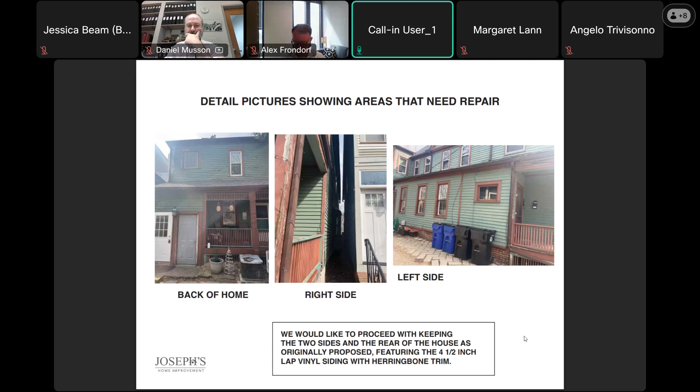We want to omit the complete front of the porch until Mr. Wintering decides what he's going to do with the front porch. He doesn't know - it's got to be maybe rebuilt later down the road, but we want to keep everything the same that we did, with the corners to be the alternate color as the trim, and the house to be the seagrass color. It's from top peak.

He would like to do it shake on the front of the house, which is the same color as the house, and the trim - they'll still do it. It's got a lot of different variations as far as the breaks in it, so my guys definitely can do it the same exact way as the house. They have a break that can make the different bends in it.

And then the trim around the window would be the same, but he wanted to do that in the shake of the same color. If he can't, they said they wanted it to just be the siding. We thought maybe just the siding, and they said maybe an alternate color. We really didn't want to do that, but if that's the case, we would.

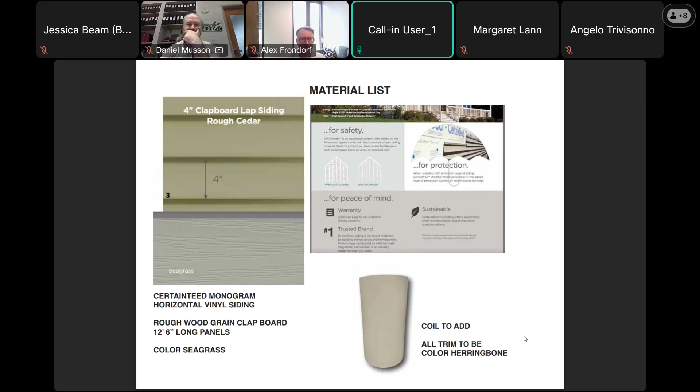But we did drive around after leaving the home when we went to meet Mr. Musson out there, and we thought that if he had to do the scallop, we would add the scallop instead of the shake. But we did order shake to begin with because that's what we thought we were going to be able to do. But if we had to do the scallop, he would just do the scallop.

And then on the second part underneath that is another part of the house, above the roof where the porch is, and that has the two windows. We would like to still case out those two windows with the trim, and if that had to be a different color, we would do that a different color. But we're just open to suggestions.

All right, does that conclude your presentation? Pardon me? Does it conclude our presentation? Oh, I think this is Tom, the homeowner. I just want to jump in and add...

I'm excited to talk to you all and get your perspectives on this. As someone who is a lifelong Clevelander, if you didn't read my note last time, I'm really passionate about helping to build up this area. I think this is such a unique street in particular, and the more that I can do to maintain the vision I had in mind, which I think is in keeping with the aesthetics of the street and also with the mission of this board, I'd love to do that.

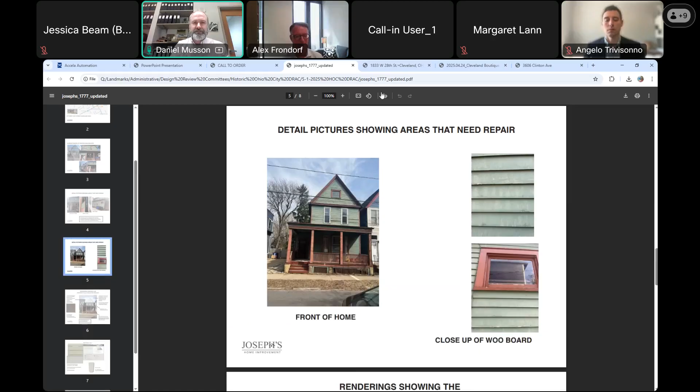Okay, thank you. And I'll be right back. And it looks like our Madam Chairwoman has joined us now. Perfect. Unless she needs a moment to get settled. I didn't see right when you hopped in. No, I saw the last few minutes, but I didn't see most of the conversation of that one. But I am here, I apologize. I had an issue with school that had to be taken care of. Know how that goes, lots of fun.

So we are on our second agenda item, which is case HOC 25-18, 1833 West 28th Street in the Ohio City Historic District. Proposed renovation.

I believe we have, I'm not sure if it's the homeowner, but I think it's the homeowner here with us, Alyssa Melendez, are you on the call? Okay, I've got your presentation up and I can click through it, just let me know when you want me to advance slides. I think this applicant did submit some additional information yesterday afternoon that is not included in this, but I think it's detail that could be provided verbally, with assurances that staff will have all the details in front of them if you guys decide to make a motion to move this forward. So Alyssa, just let me know when you want me to advance slides, please.

Okay, yeah, you can go ahead. So I am the homeowner for 1833 West 28th Street. It is a duplex, kind of on separate floors. The first floor is its own 2-bedroom unit, and the second floor is its own 2-bedroom unit. There is also an unfinished attic attached to the second floor unit, and I am looking to have that finished to add, not a third unit to the house, but additional living space to the second unit. So this will essentially be like a master suite, with a bedroom, bathroom, and a washer dryer area. That's kind of an overview of the project.

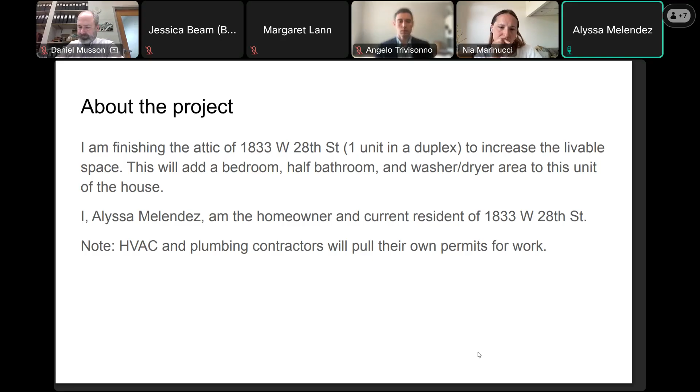You can move forward to see some pictures. This is kind of the location of the house. It's on West 28th, near Dave's, a little bit by Jay and West 28th, on that intersection. This next map shows a higher view of it. It's that blue house with the arrow pointing to it.

So here are some current images of the exterior of the house. You can kind of see the first and second floor units, and it's against an alley. You'll note in the first picture it shows a window going into the third floor. There are currently just 2 windows going into it, that front one, and you can see near the top of this back photo of the house, the back window. So those are the 2 exterior windows for that.

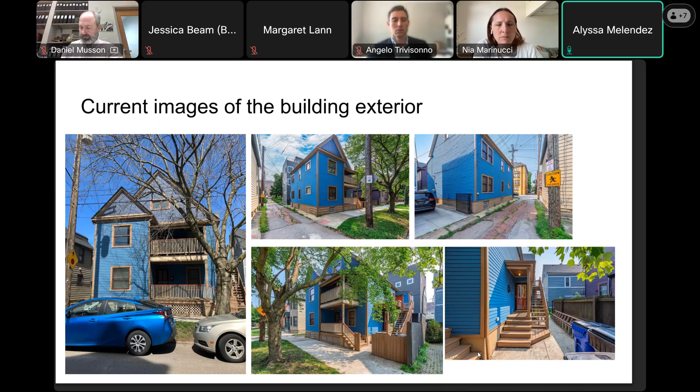We can move forward. This was in the documents I was looking at, to include a street view, so you can see what the street around it looks like. There's this apartment building across the street. Just some history about this house: according to the records, it was built in 1900, and it's been used as a residential home. It's currently a duplex with 2 units, 1831 and 1833 West 28th Street.

The modifications proposed are modifying the upper unit. Next slide. So here's some pictures of the space as it stands right now. I think there were previously the beginnings of building a 2-bedroom space up here, but it's very much not finished. The furnace for the second floor unit is up there, along with all the ductwork for that. And there's some basic lighting and electricity up there already, but no insulation or anything else besides that.

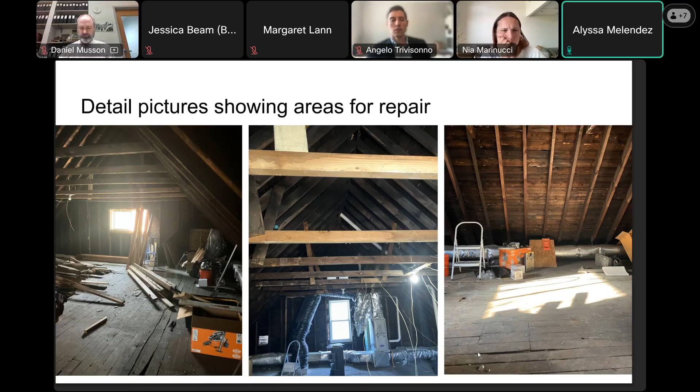You can see in one picture the vent pipe for the plumbing going through there as well. There's currently a gas line up there for the furnace, but there is also no water line up there, so that will need to be added for the bathroom. Next slide. Just more pictures showing different views. Next slide.

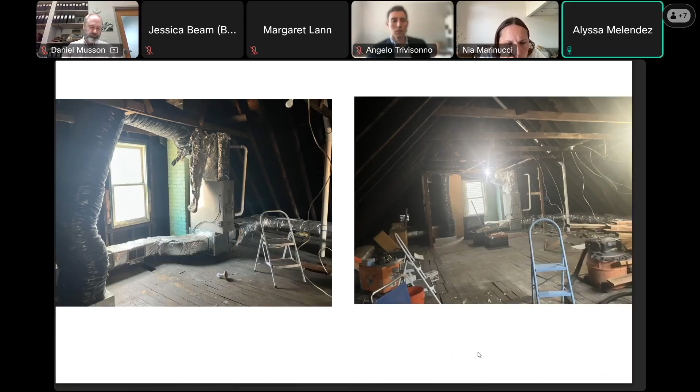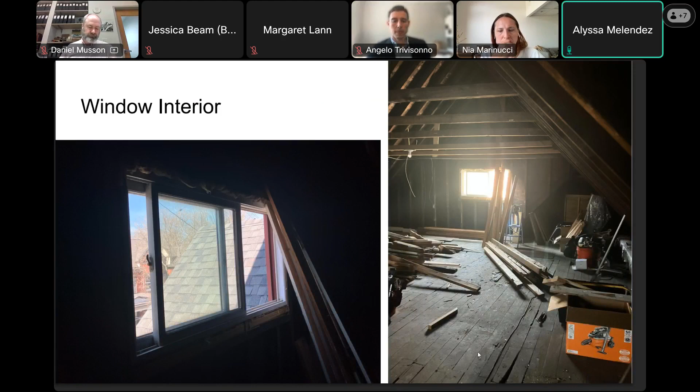So these are more pictures of the window, because there is one exterior change that will happen, and that's to this front-facing window. This is how it currently looks from the inside of the attic. And if you go to the next slide, I believe I had pictures of the exterior of the window.

I worked with an architect to do drawings for the finished attic space, and he proposed that we needed to make this window bigger, partly because of code in terms of floor square footage and natural light square footage. So the proposal is to make it 1.5 feet taller, keeping it the same style window. I added details about the size of the current window: it's about 2 feet 4 inches by 4 feet 8 inches. The new window would be 3 feet 10 inches by 4 feet 8 inches.

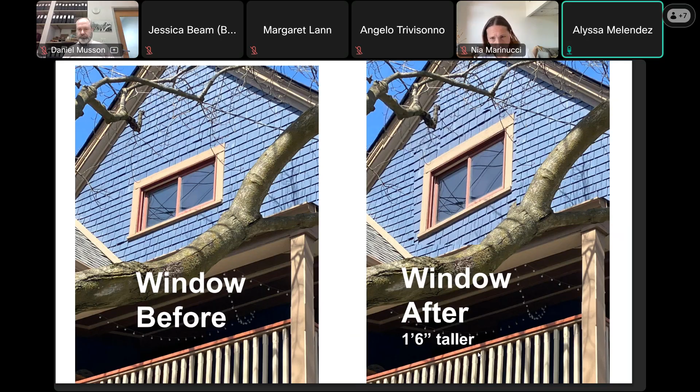I think this was why this project needed to come before the design review committee, more so for this window. Because this is an exterior change, and in terms of the interior details and changes, I have briefly included those in this presentation, but they aren't as much focused on. But we can move on to the next slide.

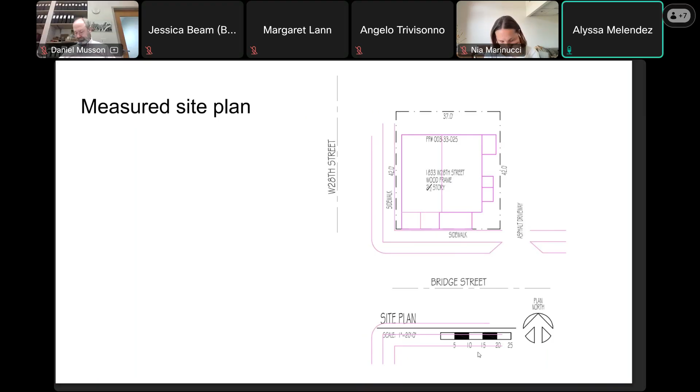So this is kind of the site plan. No changes to the building structure really and how it's laid out, but you can just see a high level view of the site and the sides of the building. We can move to the next slide.

This is the plan for the attic and the architect drawings for that space. You can see it's an open space, kind of a bedroom area. There's a lot more details on this - I included the full drawings at the end of this presentation if we need to look at any of them more in depth. I worked with a licensed contractor who's worked on many homes in the Ohio City and Lakewood area, many older homes, to architect renovations like this. So it's adding the bathroom here, the bedroom.

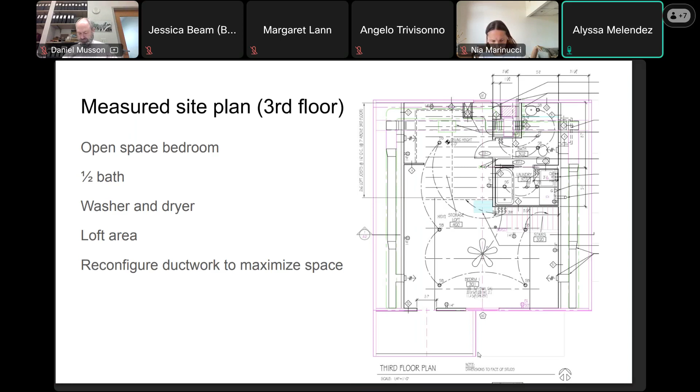There is going to be a loft area too, kind of - you can't really see it on this drawing, but it'll be above the bathroom, that half of the building, of the room. And then there'll be some reconfiguring of the ductwork to maximize the space as well. Next slide.

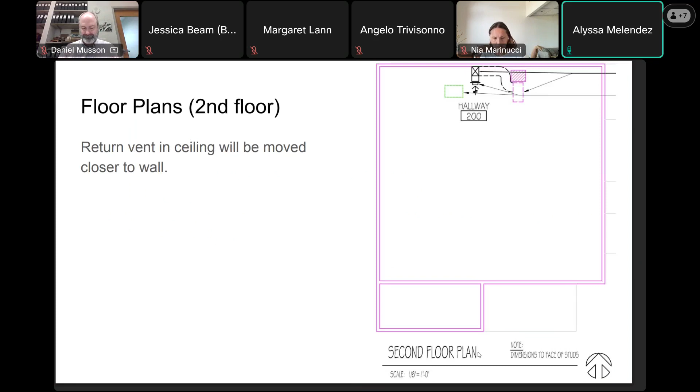This is just a drawing of a change to the second floor, moving the ductwork, moving the return vent in the ceiling closer to the wall, just to maximize space efficiency. That's the only change there on the second floor. You can see green where it currently is, and that black area is where it's going to be moved. Next slide.

Next slide. And I will say, with the window too, and the additional information I sent yesterday, I looked into the JELD-WEN windows and found a potential one that would match the new sizing requirements and also match the current window in terms of colors. So I included the model number and information about that specific window, but otherwise that's all I had. There are more slides on here about the drawings.

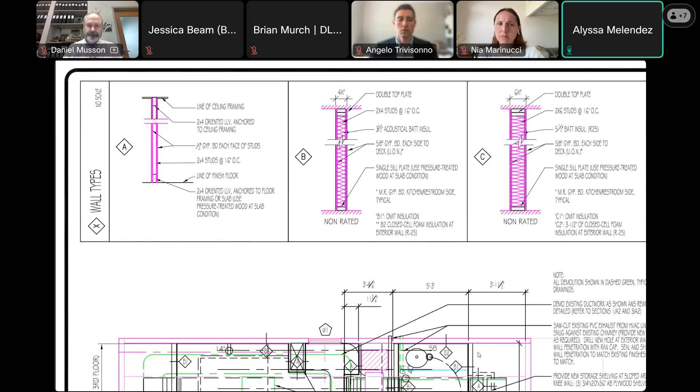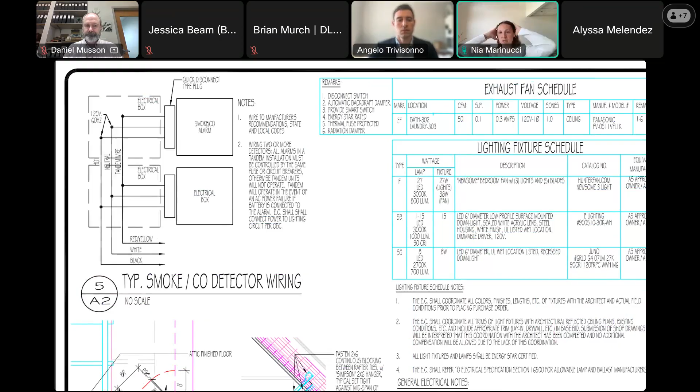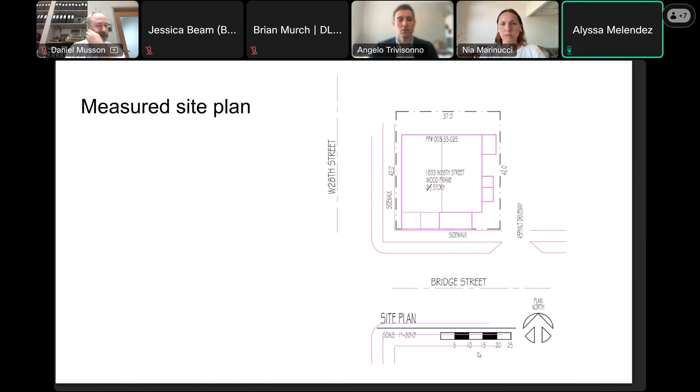Thank you for your presentation. I have a clarification question. In the documents, it was labeled as a double hung window installed sideways. Is that the intention of the application? I think the intention when I found the specific model was actually doing a slider window from JELD-WEN. I think that makes more sense because we're going to keep it sliding like that. The specific model was the JELD-WEN W5500 2-panel clad wood horizontal slider window.

Okay, thanks, I was concerned. I would, as an architect, not recommend installing a double hung window sideways, but a slider application is obviously designed to be in that orientation, so that makes more sense. I'm not sure that I have any issue with the window growing in size to meet egress code. I think that makes sense. I think it would look more appropriate probably as a single double hung window, just modifying the opening to match that, but I'm not sure if there's a physical constraint or a material constraint. Not wanting to disrupt so much of the existing material could be the consideration there, but I don't have opposition to this, effectively the same window growing in size.

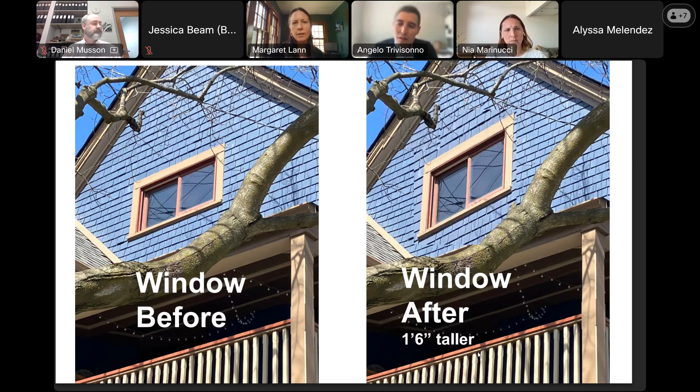I wondered, is it possible to consider a casement? I don't have opposition to the window opening being bigger. I just know that sliders can have a lot more problems because debris, dirt, and ice have more opportunity to build up in there. I also think a casement would be more historically appropriate, but does that meet code requirements? I'm not an architect, so I'm not sure.

To answer your question, most casements, well, it depends on the overall dimension, but typically casements are a good alternative to a slider or a double hung because you can achieve the required opening with one panel of the window versus half the panel of the window, if that makes sense. They are more expensive than a double hung typically, but I don't know how that equates to a slider from a cost standpoint.

Yeah, I'd be open to considering a different window type. The casement would be the same size, it just opens differently rather than as a slider. It opens out, right? It could open out or in, depending on. And I wouldn't change my vote, or withhold approval, based on that. I just wonder if it could be a consideration. Yeah, I can look into it and see, Mark.

Are you talking about one large casement window or a pair of casements? A pair, two pairs. Okay, a pair of casements, got it. Dan, is it possible, it sounds like maybe the property owner sent you a model number for the window. Is it possible to Google that and share it on the screen? Not from where I've got, kind of limited tech today. No problem. If she could share that model number again, maybe people could look it up on their own and Google it themselves.

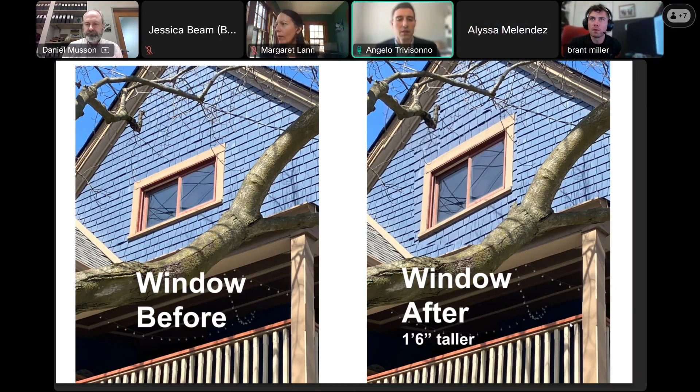But same, what window was that the property owner's thinking about now? Oh sorry, the one in the architect drawing is not the same one. Okay.

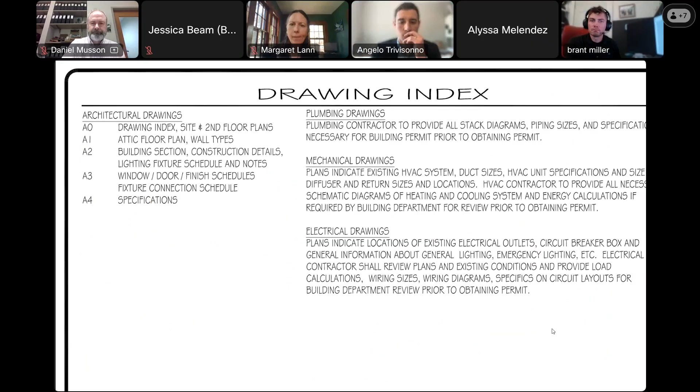I sent the name of the one I was looking at in the chat.

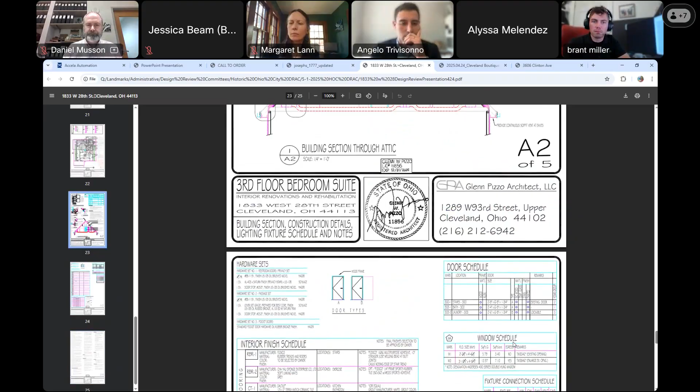I guess my only comments are I would support as presented. I have no objections.

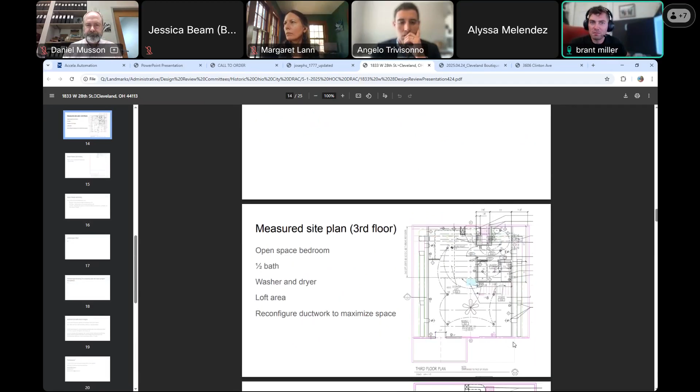Melissa, I apologize if you said this, is it going to be the same color on the exterior? Yeah, yeah, the red color on the window, okay, and then the trim as well.

And I will just say too, the model that I found, it doesn't exactly match the size. It is slightly larger, unless I did a custom order of a window, right? They don't sell the exact dimensions. But it's as close as I could get to what's needed.

Are you talking like within an inch or two, or how close? Just curious.

Yeah, so the proposal was, let me just do the math. It was 3 feet 10 inches, so that's 46 about by 48 plus 8, 56. And the model I found is 47 by 59.

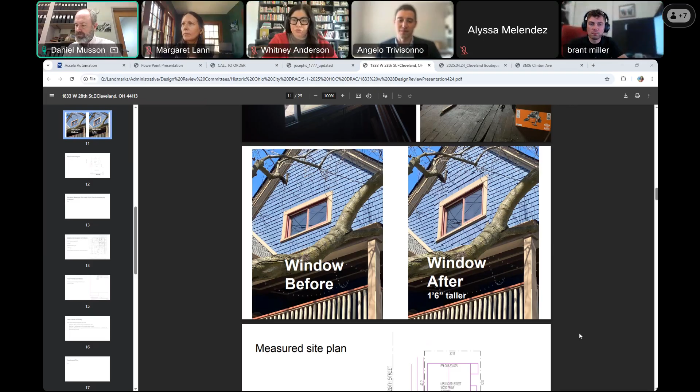All right, unless there's any other discussion. Ms. Anderson, yes. Ms. Lann, yes. Mr. Miller, yes. Mr. Trivisonno, yes. And Ms. Marinucci, yes. All right, Madam Chair, the motion passes unanimously.

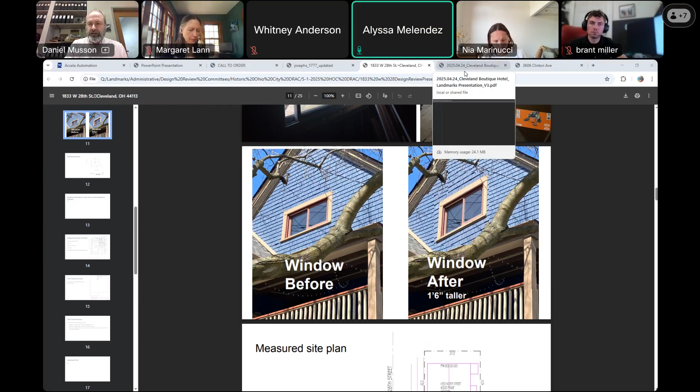All right, next up we have a schematic review. So we won't be taking a motion on this, but this is HOC 24-35, 1950 West 26th Street in the Market Square Historic District. It was previously reviewed schematically December 5th, 2024, new construction of a boutique hotel. And I believe we have Amy Haney and Dan Whalen here.

So Amy, just let me know when you want me to advance through the slides please. Yep, I'm going to hand it off to Dan. Sorry Brant, I cut you off. Sorry, I'm going to hand it off to Dan, and then our project designer Brian Murch is actually on today, so he's going to do the presenting with Dan this time.

Dan, and Brant, you're approving, right? I'm recusing myself, I have to also recuse Dan. And I don't know, is this schematic? Yeah, it is schematic, yes. So there's no motion taken, but okay, great, so we will be recused. I think I also have to recuse for the same reason.

Yep, and this is just a procedural question, I'm sorry before we start. When this comes up for a final review to us, does this committee at full attendance, do we have quorum, assuming kind of the same members? Yeah, if you have quorum at the beginning of the meeting, that's considered quorum for the entire meeting, so even though 4 of the 9 members will need to recuse themselves, hopefully enough people will show up to that final meeting that it's not like a 2-0 vote.

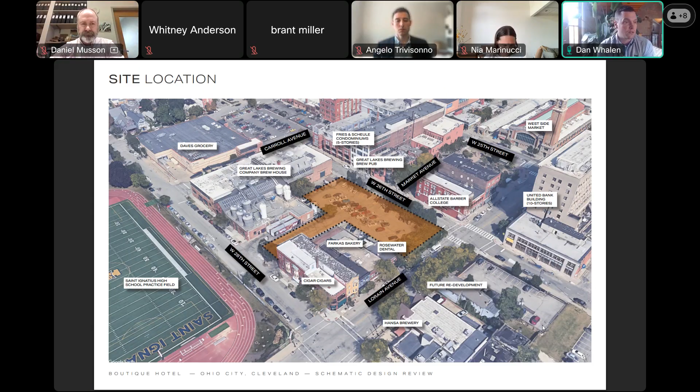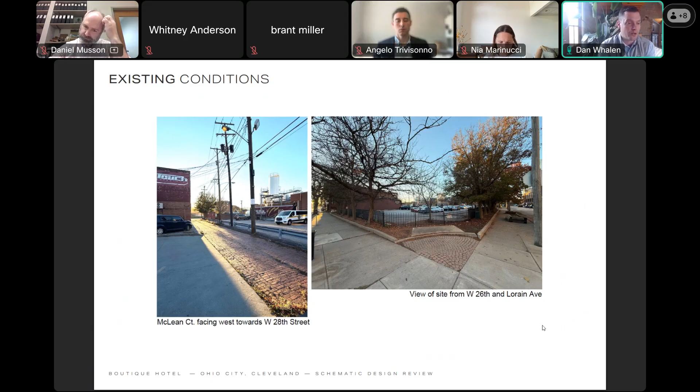So we can go to the next page, and we'll zip through these. These existing conditions are the same as last time. Lots of electrical poles, lots of overhead wires, pretty tattered and beaten concrete, and that McLean Court brick road off the rear.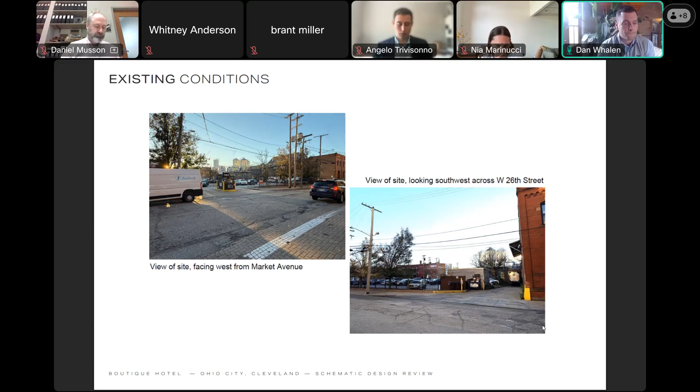So next slide. These are kind of technical and hard to read in this situation, so for the civil drawings we'll flip through and I'll gloss over, because it's much easier to read in our landscape and hardscape diagrams.

So this just shows the area we're going to be improving and demoing - that little guardhouse or toll booth you saw, along with some of these trash enclosures and a lot of the utilities around the site. Most specifically, we'll be burying and removing all the power lines on the Lorain and West 26th frontages. We'll show that in some of the renderings and views.

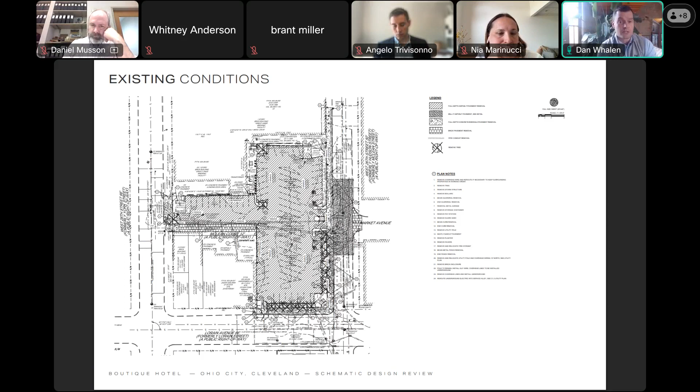But mostly it focuses on, especially since we have the luxury of 3-sided access to 28th Street as well, the ability to shove all of the service uses and utilities to the rear of the building, outside of the public realm, and really maximize our impact on the pedestrian frontage and the areas where most people are - especially that view down Market Avenue, which is now a pedestrian street at all times.

So let's sweep through these next couple pages. You can see the site plan here. We're thinking about pavings being a little more elevated than just typical concrete, so we're working with city departments on what's allowed in the right of way, and we'll push on that where they'd want typical concrete - we're going to push for more pavers and landscaped areas.

And you can see here off to the left that all the truck access, loading, trash, and those sorts of things will happen directly through that appendage that goes out to 28th Street, adjacent to Great Lakes' larger truck dock.

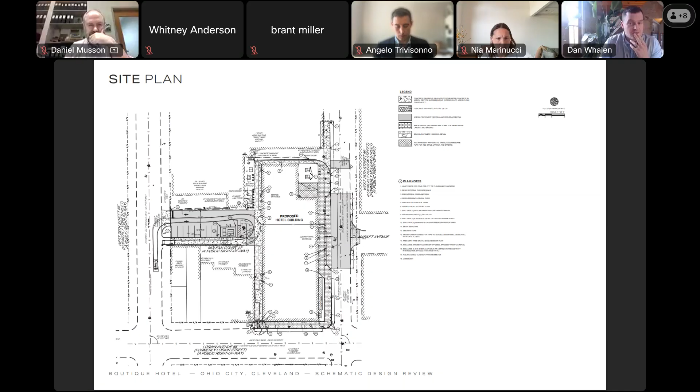You can keep going. Sorry, next page. Nothing's moving. Okay, keep going. I'll let you know when. Is it frozen or is it advancing? It's going, seems pretty slow, but now we're on the program page. So is that where you want to stop? Yeah, for now.

So I'll pass the baton to Brian, the lead design architect and principal at DLR Group, who is our project architect. But at a high level, the gross square footage - we've got a restaurant on level 1, a rooftop bar that we're proposing. You can see the key count and some of the miscellaneous odds and ends, as well as our on-site parking.

I'll quickly talk about parking. Previously we had a full level of parking at about 42 spaces net. The cost to build that relative to the space count was exorbitantly expensive. You'll also recall it made the plinth of the building, the lower two floors, disproportionate to what was happening above, and there were a lot of questions about how we might screen that. So we've taken a progressive approach to eliminate it entirely. We'll have some space behind the building in that drive lane I was walking you through, and we're working on other arrangements for valet parking and overnight spaces with adjacent property owners. We're having good conversations and feel good about it.

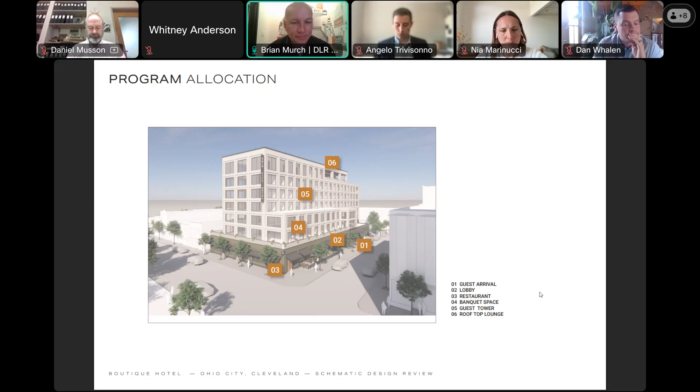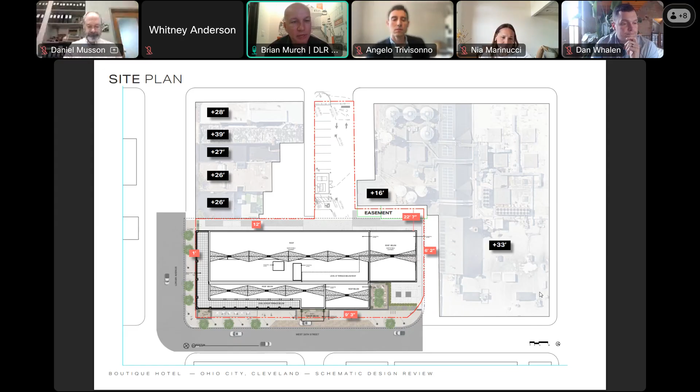So a zoomed out version of our site. The red dimensions allude back to the setbacks we have around the building. More importantly, the one that's 12 feet on the back along Lorain gives us a little leeway - as we looked at foundations for the building and those existing buildings, giving ourselves some tolerance when we start construction. So it provides access back to our kitchen that lines the restaurant along Lorain, and also gives us an access point for egress in and out of the building. So it did a couple things for us.

The next slide shows a zoomed in, enlarged version of that ground floor. The point to make here is that front arrival - we've got Market Avenue and how it terminates at the hotel, building up that architectural terminus at the end of the street as our front door as we invite guests in. Dan mentioned the enhanced paving we're planning along our sidewalks, creating a welcome mat out in front of the hotel entrance.

So you could see that darker brown material highlighting not only the car arrival or guest arrival, but also the entrance in and out of the hotel. On the corner of Lorain, you can see another version of that, with our restaurant independently branded as its own venue within the hotel, having its separate entrance on that corner.

I'll chime in quickly on the sidewalks and our approach to landscaping and hardscaping. Especially as you walk around 26th Street, there are a lot of pinch points where patios, fences, or trees make it difficult to walk in both directions because there's only 3 or 4 feet clear. There's a lot of bricks popping out of the sidewalk and a lot of broken concrete.

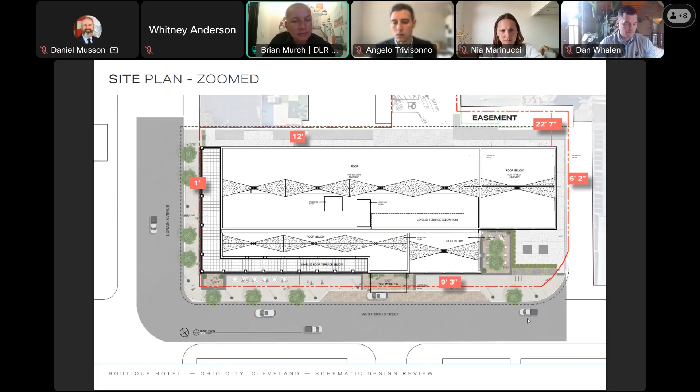Great points. The next slide covers a little bit of that hardscape in a more 2-dimensional drawing. The next slide shows off some of the intent with the landscaping. The next slide details - you could probably skip that. And the very next slide gives you an idea of some of the accessories for the site.

We're looking at the paving patterns with those pavers, trying to create some borders, specifically at the front door, where we can enhance things and create a little hierarchy as people move through the site. We're also bringing a residential character to the building, softening it up with the landscaping, having pots and planters that are movable so we can rearrange them at different times of the year and highlight some of those areas in and around the building.

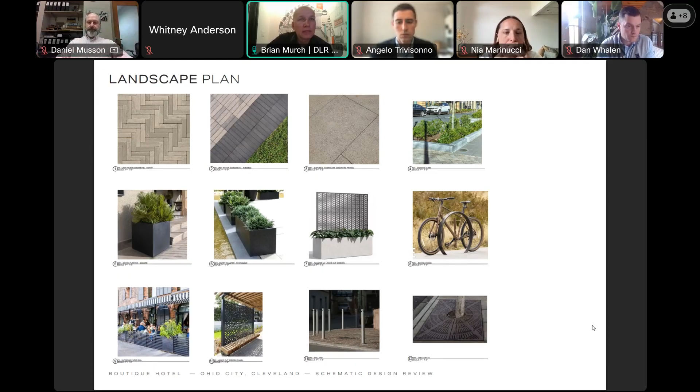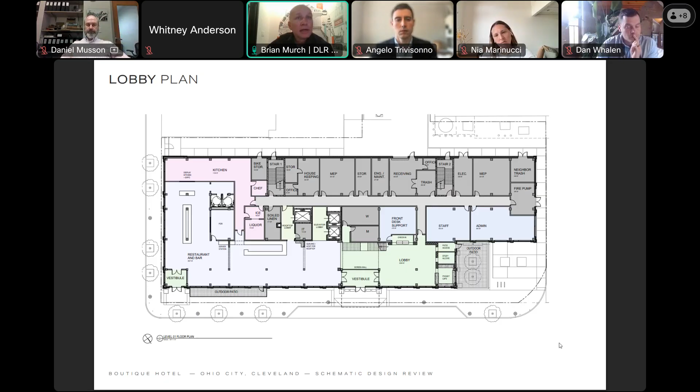The next slide takes us up a floor. We talked about that 4,500 square foot ballroom space or event space at this level. Right now we have a big two-story volume, and you'll see it in some of the 3D representations where we have a stair that connects up to that pre-function, that lighter yellow color, and then that takes you into a ballroom, all wrapped by that outdoor terrace - being able to look out over the street front and give people the opportunity to step outside.

Opposite the ballroom space is guest rooms, as you can imagine. So this would be our amenity floor. We do have a fitness center, and then thinking about the kings and queen rooms as they line that hallway that makes its way from left to right.

The next slide shows the floor directly above, and as you can imagine, that ballroom level wants to have a little more volume to it. So we can't really fill in guest rooms on those two pieces, but they do make their way down the hallway - I think that's the next slide.

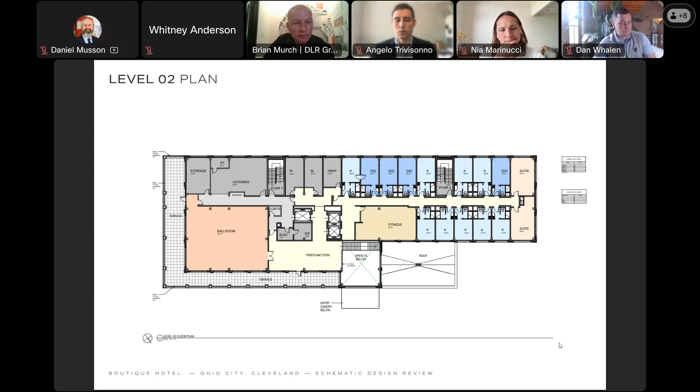Might be some lag there. Hasn't clicked over yet. Yeah. There it is. You could jump to the next one. Yeah.

So typical guest room floor plate, double loaded corridor, kings and queens. You can see how we're enhancing the corners of the building with those larger guest rooms. We've labeled them suites, just thinking about - you've got extra windows, a little bit bigger guest room. So enhancing those corners and what we can do just to wrap the architecture and have some fun.

The next slide takes us to, I believe, the very top floor of guest rooms. Maybe one more. So here we have a couple of those corner suites combined to create our presidential units. You can see in scale, it just grows proportionately. We've also amenitized it with its own little outdoor patio.

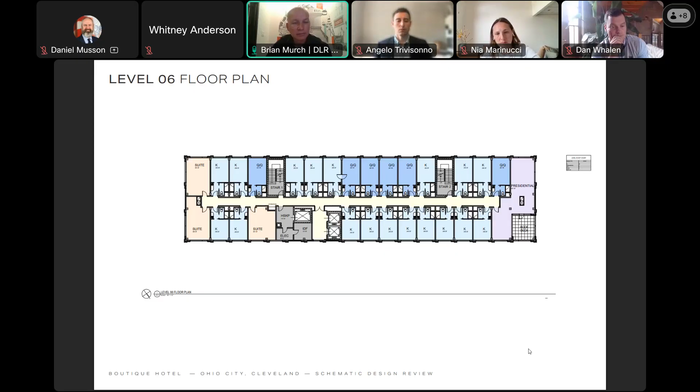And then the last floor plan, the very next slide, shows our rooftop. In this case, the lighter purple color represents not only our rooftop lounge, but also a premium venue on the top floor that is a cocktail room. So we've got an opportunity to host separate parties or do different functions so they can work simultaneously. I think with the rest of this, it's providing food service for this level, some restrooms, and then storage and mechanical at the rooftop.

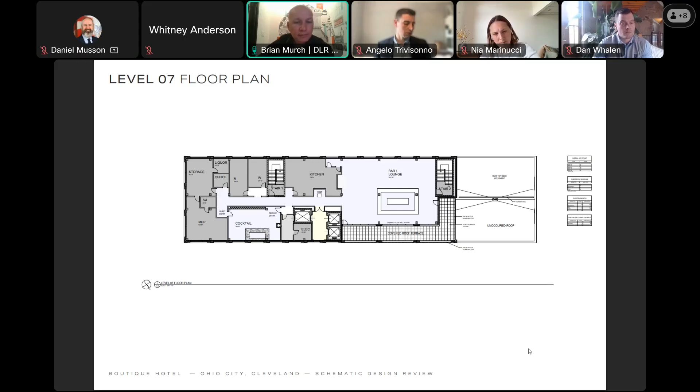The next slide starts to pick up on some of that inspiration. Dan, I'll let you kind of touch on some of this to start us.

Sure. Looking back at what we had before, maybe we were lukewarm on it, not just this board, but even internally. And I think what we've gotten back to is wanting to do something that is contemporary in nature and is its own thing, but fits within the context of the historic district and really takes some notions of each and combines them together. So what you'll see is my challenge to the architecture team was, how do we create something that's got a lot of really nice streamlined gridded rigidity to the bulk of the building, but then allows us to do some really fun stuff at the base, specifically with materiality, while not completely making it out of left field and for no reason.

And so we took nods from a lot of the stuff you see on screen and also just other districts that are maybe different in scale, but similar in terms of what they represent, like the Meatpacking District in New York and West Loop of Chicago, where these are districts that are anchored either previously or still by a famous large-scale public market that have new and old mixed together. And you're seeing some of the most intriguing, exciting architecture in my view in the United States in some of these areas. So it was kind of taking some of that, putting our own twist on it.

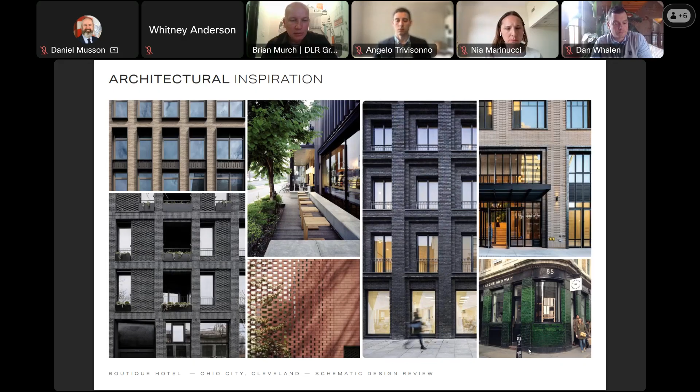The next slide is that shot down Market Ave. That front door I mentioned earlier, it's like our big marquee moment. We wanted to enhance the district, everything it represents, and then how do we extend Market to our hotel and invite people in? So the hierarchy being this box, this brick box that presents itself forward. I talked about that volumetric space, so it links itself back up to the ballroom above and the pre-function, but also this glowing beacon at the end of the street that really draws people in.

You can see the materiality starting to take place. Like Dan said, that bold green brick is kind of an emerald color that gives it a little bit of a riff off of the landscaping and stuff as it highlights those entrances and softens it up. But at the same time, it really creates a contrast from the base or the podium to the tower just beyond.

Just some additional commentary on the material selection we're leaning towards, really about warm materials. So it maybe reads a little bit white in terms of the upper brick, but I think it's going to be more of just a slightly off-white, more ivory, slightly beige tint. There's some projection and depth to how we're insetting certain areas with windows, and even coursing around those windows.

The green, I think, just adds warmth, and it'll probably end up being somewhere deeper than emerald, but maybe not quite a dark hunter green. You could probably tie that to Forest City and some of the Cleveland history in that regard, but more than anything it just feels anchored. It feels warm in an area that, because you're in a city, tends to lean towards heavy concrete and not a ton of green space on these commercial corridors. So I think it feels good in that context.

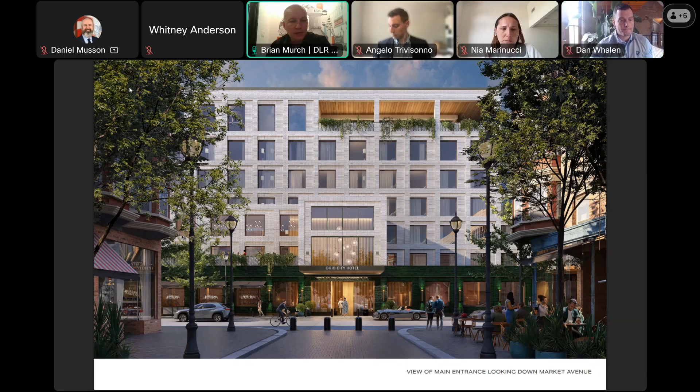So the next slide takes us right up to the front door, just thinking about that guest arrival moment where we set the tone for the interiors of the hotel. Again, the warmth of materials, just thinking about how we use wood in the canopy on the front door, making it less commercialized and a little more having its own personality. We've investigated a lot into the branding of the hotel and the statement we're going to make both on the interior and exterior, so we're excited about all that.

You can see some of those design threads weaving their way into the architecture. I think the other point Dan made earlier was just the breadth of that sidewalk. You see how the street trees and lampposts really offer a lot of accessibility in and around the site, the cafe seating just outside the restaurant and the bar just beyond, closer to Lorain. So again, making it very interactive with how the inside of the hotel conveys itself to the outside, helping activate that street.

Anything else on this one, Dan? Do you want to jump to the last one? No, we can go to the last one.

And while we're doing that, I'll just chime in with, we're using probably more of a darkened bronze as the mullion color and some of the miscellaneous metals and detailing on this building, as opposed to a harsh pure black or anything like that. So it's rendered out right now somewhere in between a more brassy color and a dark bronze, and we'll investigate that as we go and bring those final materials once they're selected in the next stage.

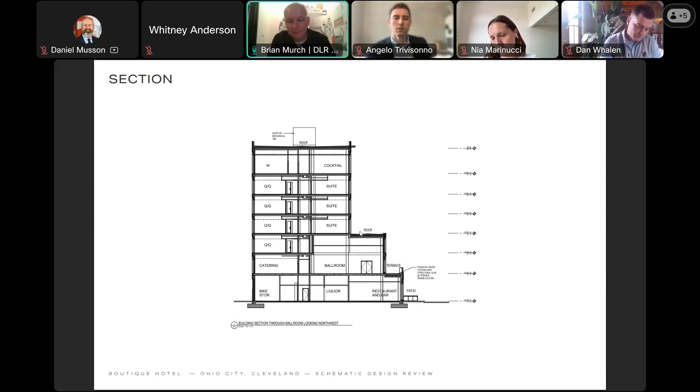All right, since our chair had recused herself, looks like Angelo, it is you and Margaret—did Margaret have to step off? Yeah, she put in the chat that she had to leave. Okay, yeah sorry. They said... I know it's a lot to put on you, Angelo, but you're the only committee member who's here and hasn't recused. I'm happy to chime into the conversation if you want, if that's helpful at all. But yeah, I'll let you go ahead with your thoughts.

I'll say that I think this new conceptual plan is really excellent. I think the renderings are really helpful to understand the massing, especially, and even the materials. I think the pedestrian experience, that building wall, that zone right there, it's a full correction. I think the last plan that had it set back with large columns was the opposite of this, and this is very good. I like the viewpoint looking west along Market Avenue.

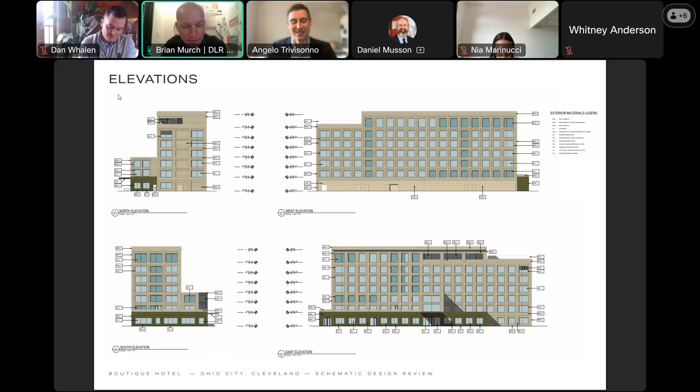I think as you turn the corner, you always kind of bump into these situations where the rules start to get broken, but how do you maintain that same aesthetic? Going back to being an architect and understanding that, like Dan mentioned, it's just something that's in development.

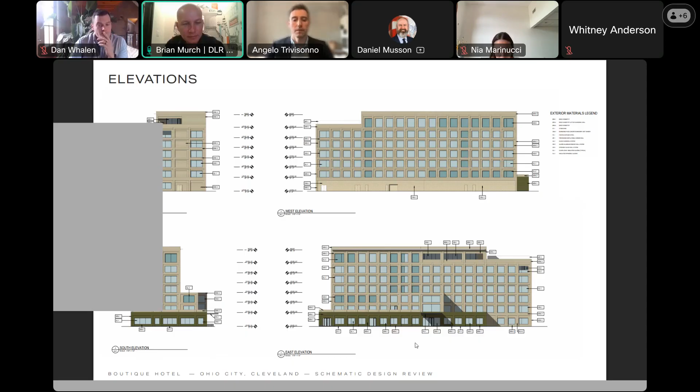I was just finishing by saying it looks great. If this were for a vote, I would vote yes. So good luck with your future progress on this.

Thanks for your feedback, appreciate it. Thanks for not recusing yourself, so we have feedback.

Since everyone else has recused themselves unless Angelo has additional comments, I guess just from a staff perspective I would echo a lot of what Angelo said. We haven't really discussed this as staff much, but my reaction to it is much more favorable than that first round.

I thought there was a lot of interesting and fun things going on in that first proposal, but as far as fitting into the neighborhood, this is much more contextual. It fits into the district both in scale and materiality. I think Amy and Brian have both done a great job under your direction, Dan.

I think even the texture and colors of the masonry - having that first floor offset as a different color - I think that green could be really stunning. With the upper floors, I think, like you said, we want to avoid a pure white.

But looking around, there are some terracotta buildings. You've got Fries and Schuele right across the way. I don't even know who's in that building right now, but the one right across the street used to be the #1 Cup building, right across from Fries and Schuele on 25th. So there are examples of that kind of feel.

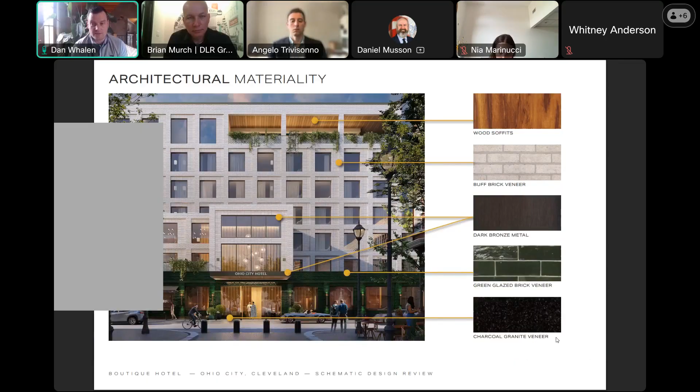Yeah, no, I feel good. I feel also just great about what we're presenting, and I think that goes a long way as well. When we go next week to the commission, we'll have, I'm sure, tons of feedback of all types.

But no, I honestly wish that more people were able to opine and give their feedback. But hey, sometimes it just comes with the nature of the business, so I understand. A lot of partners, a lot of people, I think, want to see this one happen.

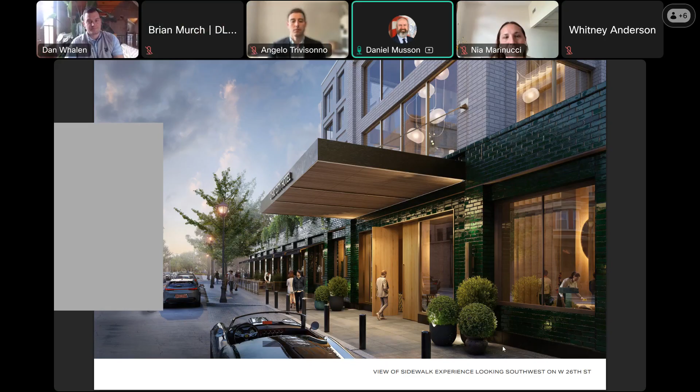All right, last but not least, we have case HOC 25-19, 3606 Clinton Avenue, the Ohio City Historic District.

I believe we have Patrick here, who is the homeowner, and he wants to do some renovations to his home. From a staff level, this is one we could have handled administratively because it seems like the work is generally appropriate. There might have been a little back and forth clarifying details, but Patrick, I think it's one you guys should see, just to highlight what a good project looks like, and as a reminder of some of the stuff that goes on that you don't always get to see in our every meeting. Patrick put together a very nice presentation, so I'll hand it over to Patrick.

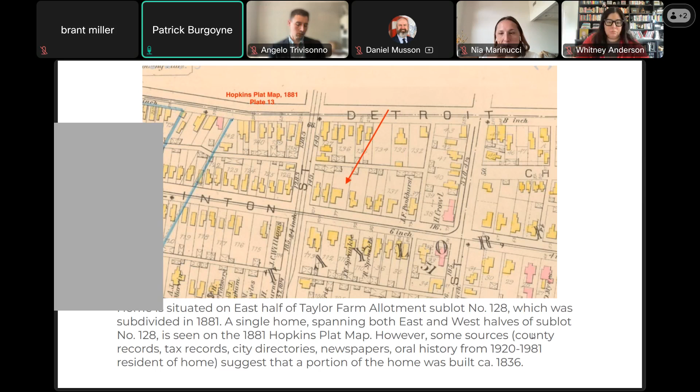So this map is showing the house that existed across both east and west halves of sublot number 128 prior to being subdivided. My house now sits on only the east side of 128, and there's a separate home, my neighbor's home, on the west side. Next slide, please.

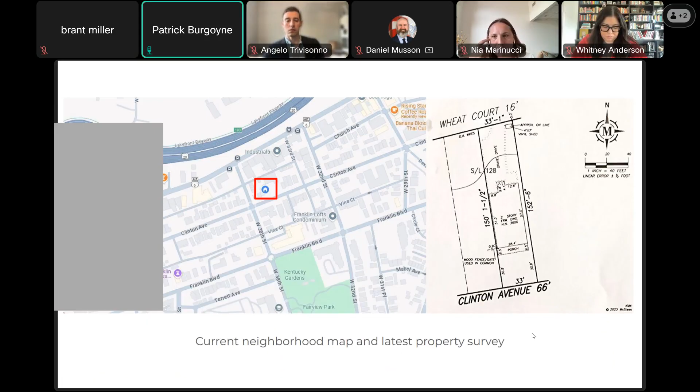I don't know if I'm the only one seeing this, but there's like a gray box covering part of the slides. Do other people see that? Which part of the slides? It's like a portrait-oriented gray rectangle on the left-hand side. Oh, there it is. Was that on all the slides? It was, but it wasn't blocking any important info yet, just covering the west facade of the house. It wasn't on the slides of previous presenters. Only weird, sorry. No, you're fine.

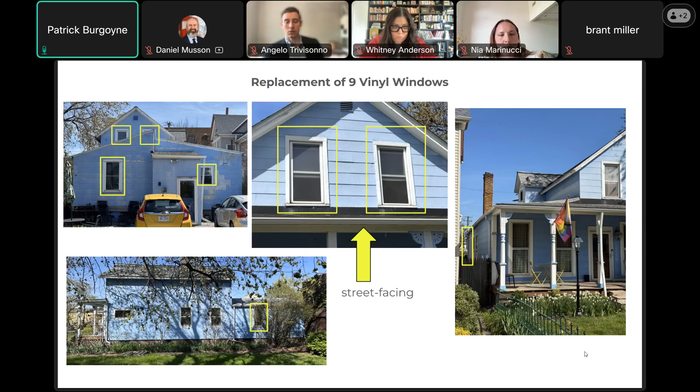After doing some research and talking with some neighbors, what I'm proposing for the replacement windows are the Marvin Ultimate Double Hung G2 windows, which have an aluminum exterior, which I'm proposing in the evergreen finish, and a wood interior. I would also be looking at replacements that don't have any divided lights, to match the existing original wood windows on my home.

The next category of renovation is restoring the front facade. My entire house is covered in composite siding, and dealing with all of that isn't feasible for me to accomplish anytime in the near future, but I think there would be a big visual impact to addressing it just on the front facade.

I plan on painting the rest of the house's composite siding as is. But on the front facade, there's some damage around one of the windows on the 1st floor that exposes 5 1/4 inch drop siding, which I have no reason to believe is anything other than the original wood siding of the house. I'd like to take the composite siding off the front of the house, repair that, do the paint scraping referenced earlier in the meeting, and repaint it.

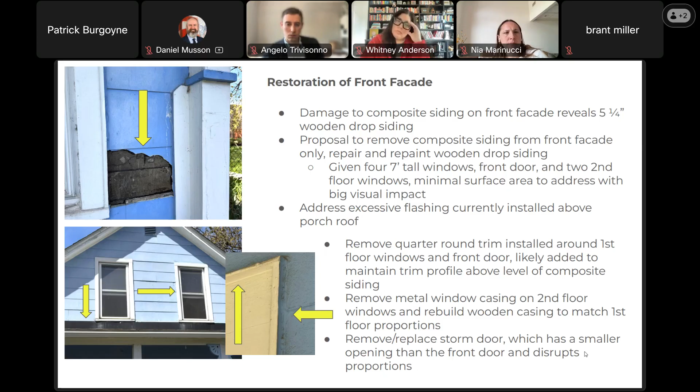So my thinking is that I would leave the house as is in terms of ornamentation, very plain, but I would certainly be open to and hoping to discover original detail while doing this work, and restore that if possible.

So if I were, for instance, to find scalloped detail in my gable under the composite siding, I would absolutely restore that and would not want to be removing that detail.

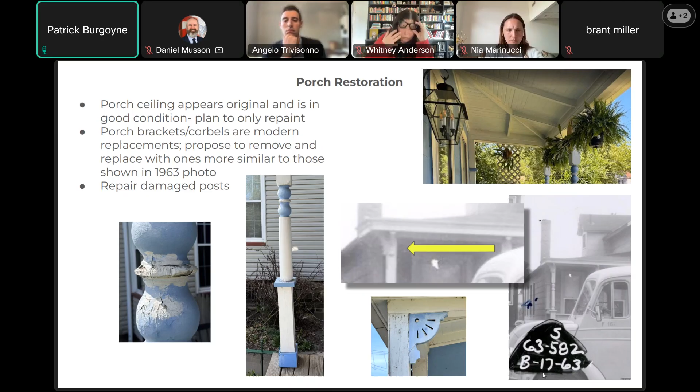The porch floor and porch steps were recently added by the previous owner and are really not doing any visual favors to the house. So I would like to replace the porch floor with a tongue and groove floor to be a little more historically accurate, but I also wanted to note that the joists of my porch floor run perpendicular to the front facade, which is not typical for houses in the neighborhood.

So the floor would run parallel to the facade of the house, and I'm proposing—asking permission, I guess—to leave it that way rather than have to rebuild the foundation of the porch, and only replace the porch floor.

I would like to replace the steps as well with something that looks nicer, and the railing with also something that looks nicer. I added a note that I'm looking for guidance here because I'm not 100% sure what would be appropriate for the steps and railing, but I definitely want something that looks better than what's there now.

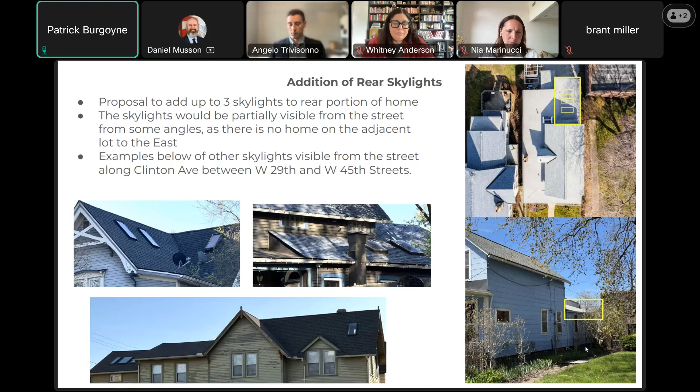I think that's actually the last slide. Okay great, thank you. So thank you for your time, and if you have any questions or recommendations to point me in the right direction, I'm very open to them.

I'll just, okay Nia, you are still here. I can't see who's in the meeting anymore. I'm still here, I just couldn't find my unmute button.

Thank you, Patrick. This is super well thought out. This makes our job easy, so thank you for having such an appropriate approach to your home. I have a couple thoughts. To be clear, I don't have any opposition to anything you've proposed, but because you asked for potential feedback, I'm happy to give a couple of my initial thoughts.

One is that I'm curious if your house perhaps could have had a bit of a Gothic revival inspiration, similar to the one that's on 31st, which is also yellow, since you're pursuing yellow. That could be stylistically a direction to go. Maybe that would look like 2/2 windows instead of the clear double hungs you're proposing, but I'm not suggesting this is what you should do, just food for thought, since it seems like you're also interested in the historic pursuit here.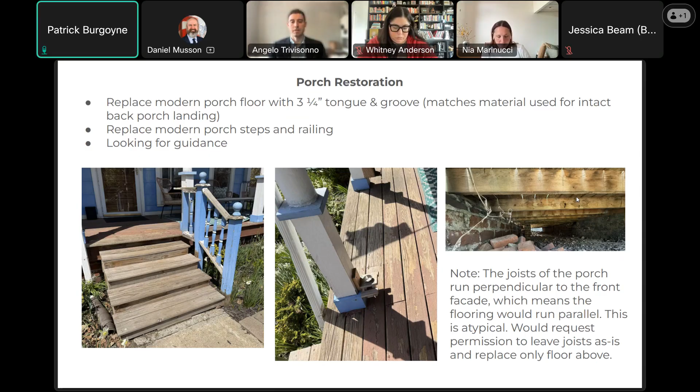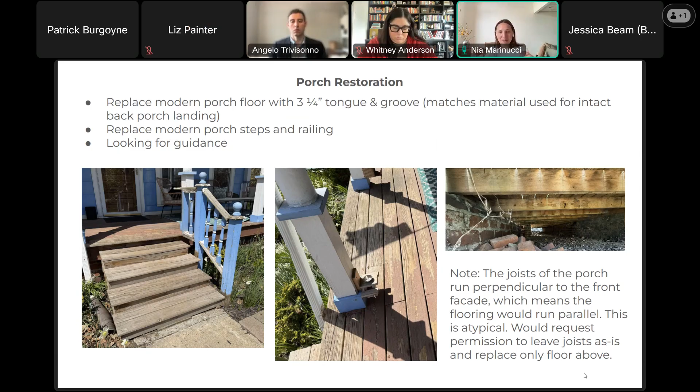I think of another colleague, an architect named David Ellison, who's a strict classicist in the restoration realm of the neighborhood. Something I've learned from him is that we shouldn't be adding detail based on conjecture, or something like that - I'm paraphrasing since he's not here. So if you wanted a strict classicist approach, you shouldn't add detail unless you have strict historic evidence showing that was the original detail.

You have that 60s photo, so I think it's safe to say there's some reason to think there could have been more detail here. But personally, I don't know if the porch in this iteration, or a porch at all, was original. So take it or leave it. If you're not going crazy with the gingerbreading and it's done in a refined way, I don't necessarily mind adding a little more detail to a house. But Dan, what do you think?

I think you're right. Looking at this house, it honestly looks more like it would fall into that workman's cottage category. It might have elements of Greek Revival, maybe some Gothic vibe, but generally it was built to be efficient and functional. We see a lot of this vernacular style in the neighborhood - that kind of 2/3 window bay setup.

So the porch was probably added later. I'm guessing that underneath those squared bases of the porch, you're going to find a more rounded, turned spindle column that goes all the way down. They probably boxed it in at some point.

Like Nia said, with conjectural stuff you can go either way - you could be a strict literalist, or you can get out of control with it. I think balance is what's important. Like on Tim's cottage on Whitman, most of those porch elements were conjectural because he didn't have strong evidence of what was originally there. So the porch columns on that house are stacked - there's a 4x4 base, then it's stacked out with 1x6, 1x4, 1x8, creating the feel of something more round than it really is. There's a way to use modern materials and make references to potential historic elements without confusing anyone into thinking it's original to the house.

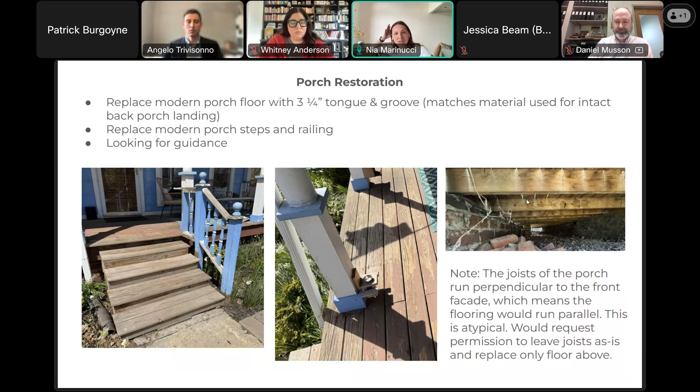Just 2 cents as well on when you go to pursue the roof, I love that you found the evidence of the slate being there at some point. I don't think you need to go as far as composite slate if you don't want to, totally fine if you do. I just, from a cost standpoint, think dimensional shingle would be just fine on this house as well. I know how this stuff adds up, and I would very much rather see you spend the money on those beautiful Marvin windows. That's the best option if you're going to spend it. I don't think it needs to be that by any means.

I'll just jump in, great presentation to the homeowner on this. Just some procedural questions: I'm assuming the building permit has already been submitted, which is why you're here. No, actually, I don't know anything about that process.

Okay, gotcha. All right, so I think just procedurally, any approval that we give is only 12 months. Maybe it can be extended by staff or something. So for the really long out stuff, we're just all vibing here today.

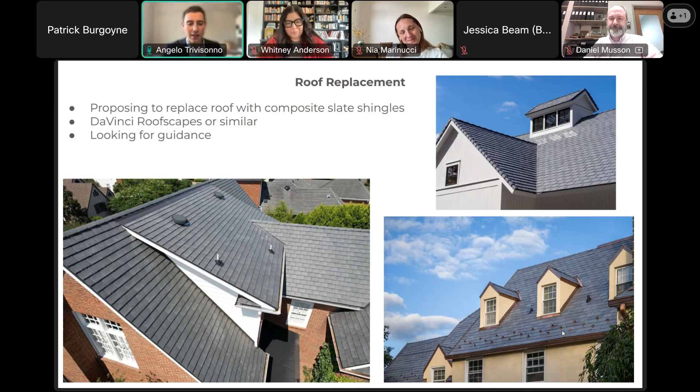The other question I had was, I was wondering if maybe Dan and maybe Nia or Whitney can take a look at that siding. When I initially saw it, I clocked it as a material that is not composite, a material that might need some careful removal. I don't know, that would be my knee-jerk reaction, is that it's probably asbestos siding. That's common early 1900s, you see it pop up a lot through the 40s, and yeah, just the way it's cracking, that brittleness, that would be my first assumption looking at it.

I don't really, just to be transparent, know what composite siding is. It said composite siding on the appraisal card that I found, so technically it's composite siding. Asbestos is basically a cementitious siding that has asbestos fibers in it that were great for insulation, great for fireproofing, great for everything. Just kill a lot of people.

So be very careful when you're working with it. I would say get a respirator or something. If you hire someone, make sure that they're certified to handle the stuff. It's one of those things, you could have a company probably pull that off in one day. They could get the front cleared off, but the process they have to use with double bagging and ventilation and all this, it could be quite a process. Basically all the OSHA regs kick in if you're hiring someone to do that, and they're hiring other people. You can safely do it yourself, and then you don't have all the OSHA regs to deal with.

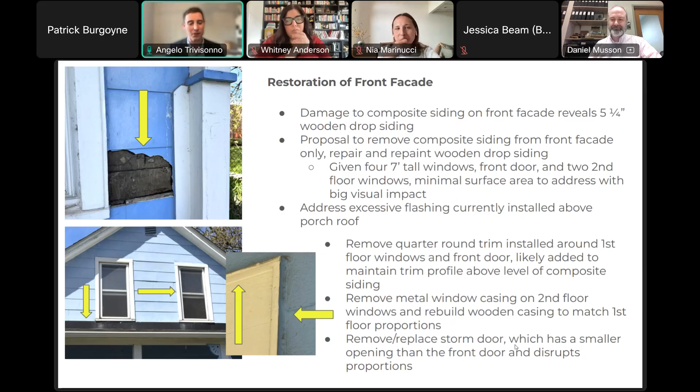Noted, yeah, I just wanted to flag that because it doesn't sound like you've started yet. And then the other thing, water is, in my mind, the primary killer of all of our old houses and structures, so it's great that you're thinking about water. Right now it looks like that one little downspout is kind of right in the middle of that porch, on the left side of your porch stairway. I'm imagining most of the water's coming off the left side of your house, based on how your roof is looking. So maybe once you hire a gutter person, or if you want to do this yourself, I'd probably slope it down towards the left and right sides and put downspouts there if you can. I don't know if your property has stormwater.

Is that your lot line, that fence there? Yes. I don't know how you'd hook in, or if you just dump it into your landscaping plantings there. It just dumps into the landscaping. Okay, other than that, great research. When you get this ball rolling, I know this is going to turn out to be a great project, and you're totally right, this is a level of research you could be a top-notch detective.

This is all really good. Good luck with everything, and feel free to come back. Dan will be helpful, and we'll try and be helpful too. Yeah, and Patrick, you've come to the right place to nerd out on this kind of stuff.

It's kind of to Angelo's point, there's a lot of steps to your project. We don't expect you to put them all in one.

Oh no, you froze. Dan, we lost you. Can you guys hear me now? Yes, you're time traveling.

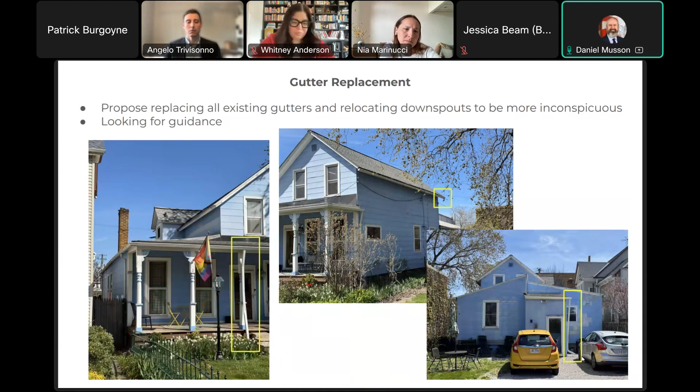Like the way we do with the cultural gardens, you come in and submit your master plan, and then as the elements of it come through, we can sign off on the permit applications for those without having to go through a whole review process. So it sounds like everybody's comfortable with what's being proposed and is greatly in favor of it.

So I'd say as these pieces and parts come up, as you get ready to do any element of it, apply for your permit, and my staff can talk you through that process. We might ask you for some details, we might have some back and forth. My staff can be a resource to you as far as figuring out those details, if that's helpful. But you don't feel like you have to apply for or do it all at once.

If the committee's comfortable with it and recommends a recommendation, then I think we'd handle this more like a master plan, and then deal with each little element as it came up more administratively.

Okay, and just for my information, you said someone could walk me through the process, but does each element need its own permit? For instance, the thing that is not just aesthetic is the windows on the second floor - four of the vinyl windows are truly broken and I need to replace them. So would there be a permit for the windows and then a permit for something else, or is this not the right forum for that?

Yeah, you can apply for it, and we can talk offline if that's easier if people want to get rolling. But in general, you can apply for a general construction permit and include any number of things - you could do your windows and porch repair. It's just how much information you have to provide building and housing. If it's just windows, that's an easy permit, since you've told us what window you're going to use, we can sign off on that.